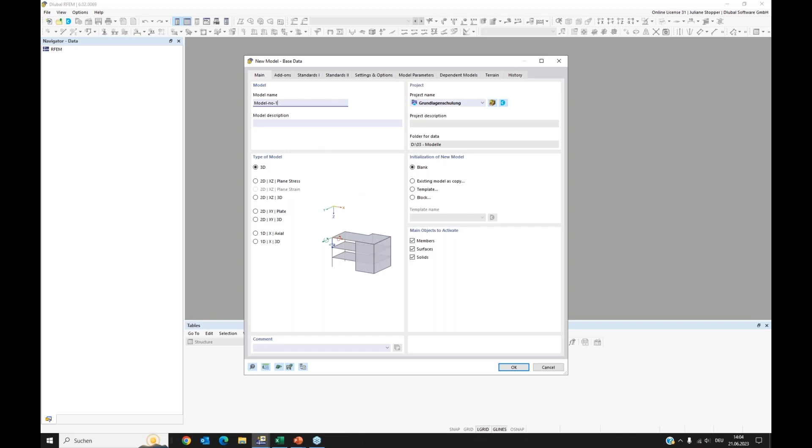In this register, I don't need to change anything. We can jump to the add-ons register and activate our geotechnical analysis add-on, found in the area where special solution add-ons are placed. I activate it and press OK. Then our model is prepared, and the add-on will be integrated into RFEM. So here we go - we have an empty model now, and we can start modeling.

First we go to materials, and I will create the materials we need in this first model. I will use materials from the library, which we can open via this button. I'll use gravel, a sandy gravel, as the first material.

I apply this, then add a next material - sand, maybe coarse sand - and a third material, medium plastic clay. This is just an example of materials, because we will focus on modeling today.

One more thing - when we have the geotechnical analysis add-on activated, we can select the material type soil. When we have a material of type soil, in the material model part we can find the special, valid soil material models. We currently have the Mohr-Coulomb model and a nonlinear elastic material model.

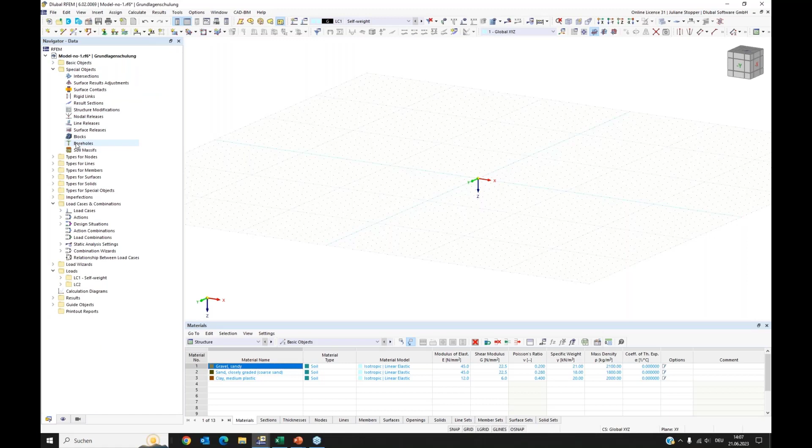We will go directly to the special objects, and here we can see 2 special objects that came with the add-on geotechnical analysis. We have here the boreholes, and we will now use them.

Here we see the dialog for entering boreholes. The boreholes provide you an option to directly enter the data you have from your geotechnical report. You have, for different locations at your field where you will construct your building, values along the depth that came from that report, from tests and so on.

And this you can enter here. You can enter the location of that borehole. You can enter a groundwater level. We will do this here, we give 4 meters. And here you have to, or you can, assign the soil layers.

We start from the top and go into the depth. In my example, we have sand at the top, and it's 2.5 meters deep maybe. As the second material, we discovered or found clay. It shall be 2 meters, and then we have the gravel, which is 15 meters in my example.

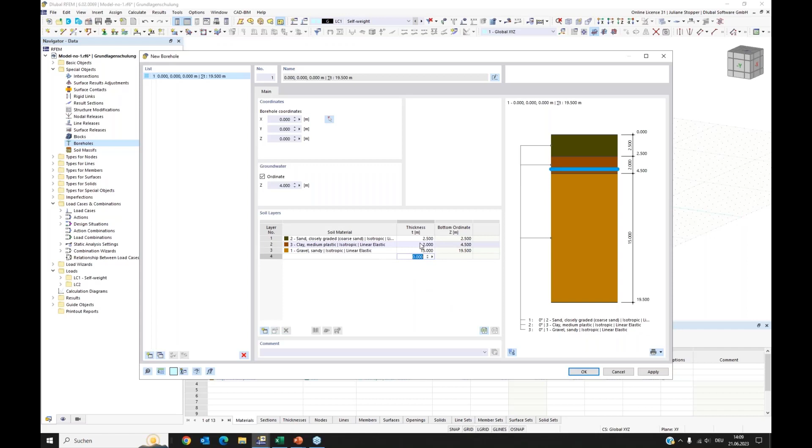Okay, now we have the borehole data given, and we can say okay. Then we see here our first borehole. I will remove this

work plane - I will deactivate it so I don't see it anymore. Here we have the first borehole, and we need some more. We have, of course, more in our field, and I therefore will now use the background layer. We can find it here in the navigator, in the guide objects. Here at the bottom you can find the background layers, and I will open the dialog.

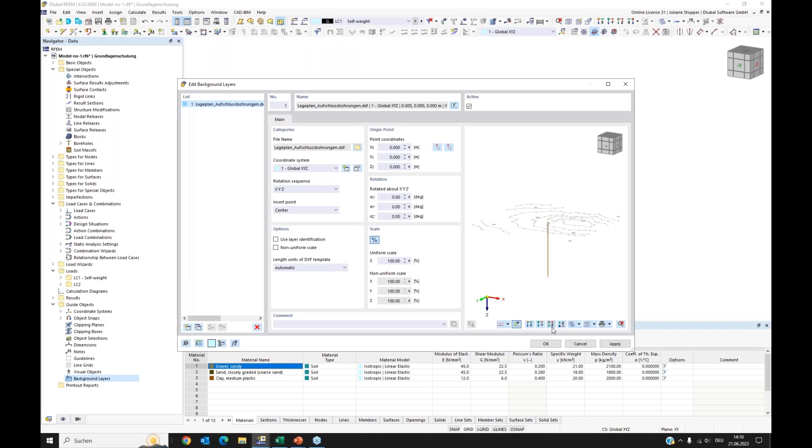As a background layer, we will import a DXF file, and I can do this here. I can directly go here, and here I have the plan of my area, and in that plan the locations of the boreholes are given. I see that I have to transform this. You can do this in this dialog, and this is the plan how it is correct.

And I want to use an option - I want to use the option Use Layer Identification. I activate it, and there you can select the layers of your DXF file that shall be used for the background layers. I deactivate the DL nodes. And this is a preview, and I accept this, and this is fine.

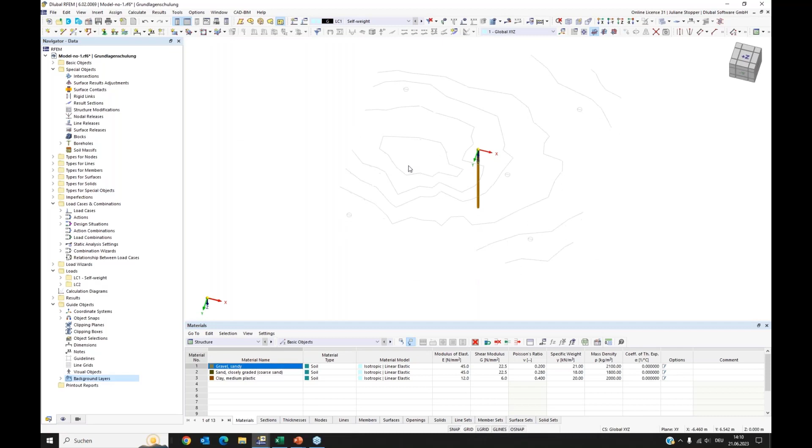Okay, now this is, let's say, my map with the positions for my boreholes. I will modify the object snaps - you can also find this in guide objects. I only now want centers to be picked, and I say OK and set to active.

So now I want to place more boreholes via drag and drop at all these locations. Therefore, I create a node at the top just to help me doing this. Okay, now I can select this. Now I select like this. I have my borehole and this helping node selected. I press Control and I can move it to the place in my background layer in the graphic. And as you see, the last copy is always selected, so you directly can go on with copying with drag and drop.

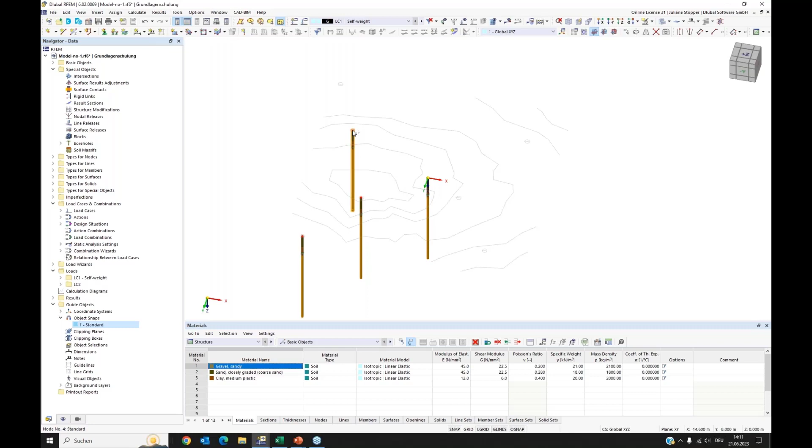Okay, that's it. Now I have my borehole in all the locations. I wanted to delete the initial one because there's none. Now I have, at all the locations that I got from my project partner with that plan, placed these boreholes. I will delete these nodes - I just needed them for the process.

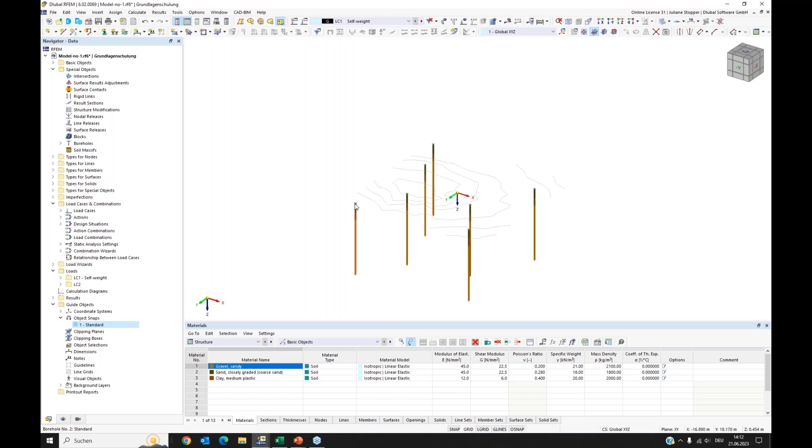And now I have my boreholes prepared. Yeah, and there was no need to measure these dimensions or to fill in data manually - you could just use the drawing.

Okay, then I want to use my boreholes. I can use them for creating the soil solid that shall be analyzed. And therefore we have our second special object - you can see here we have the soil massifs, and I open the dialog for this.

With the soil massif, you can generate from boreholes the soil solids that you need for the analysis. You can enter manually the numbers of the boreholes, or select them graphically. There I have them assigned.

Then you need to give geometrical information for the soil massif. You have to enter a center, I keep it with 0, and you have to give the dimensions. I will give it 40 meters along both sides. And we have the option to activate a groundwater level.

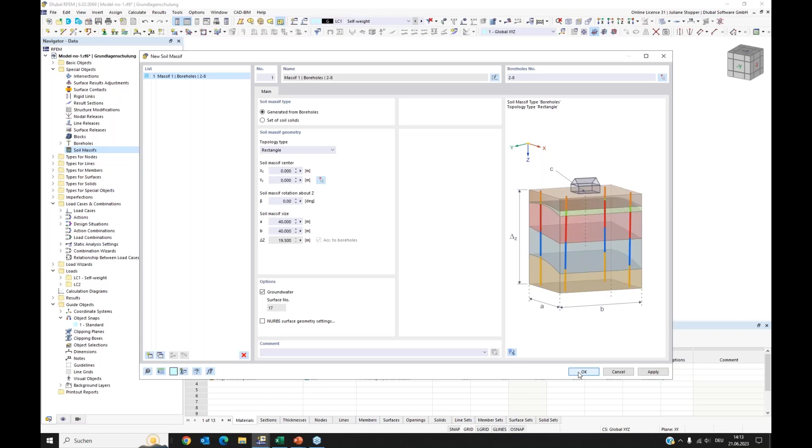Okay, we gave all the input that is needed. And now here we can see our soil massif, our soil solids were generated. I switch on the solid model, we can see it more easily.

We have here in the navigator for display the option to change the display so that the color is dependent on the object property. We can also see here the material and the color that belongs to each material.

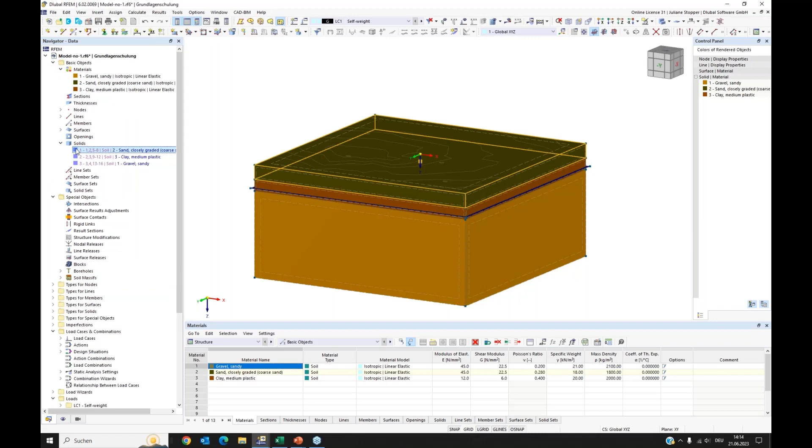So what came with our soil massif? Our soil massif generated 3 soil solids for us. We can find them here. For each soil layer, 1 solid was generated. And we also have a groundwater level surface generated.

And we have, we can find here, surface supports generated. This and this. We can see them also in this window when we go to wireframe model, for example. Here we can see it.

We have at the vertical boundary surfaces a sliding support, so only in the local Z direction these surfaces are supported, and we have fixed support at the bottom surface.

So with this generation, the solid is connected to these boreholes. So if you change data in the borehole, if you change a layer thickness or something, the massif will be automatically updated.

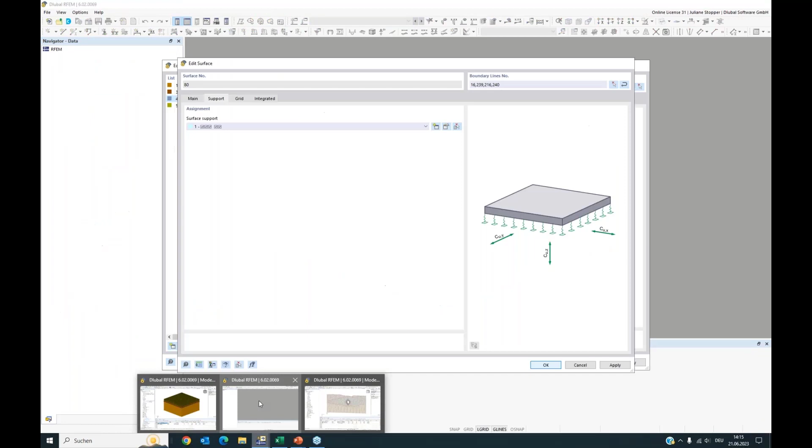Yeah, so that's it. This is what I wanted to show with the first model. We can go to the next example. This one is prepared. Okay, I will save it and we go to another RFEM for going on with the next topic.

In this next topic, we want to use a DXF file again, but we will not use it as background layer. We will directly import it, and this I can do here. I go on File and go to the Import button. And here I can import a DXF file.

I have to select the file. I have it here. This is a geological section of the ground, let's say, a drawing. And we will come to an import dialog where we can do last settings before the import.

Yeah, here it is. Here again, I can use this layer identification. And again, I don't need all these nodes. In this case, my model is prepared. I don't need coordinate transformation, so I can say, okay, it can be imported. So, and this is it.

I have here now the DXF file imported, and now we can see the difference regarding the background layer. Here we have real objects imported. We have lines and we have nodes, and we can work with them. We can edit them, modify them, use them.

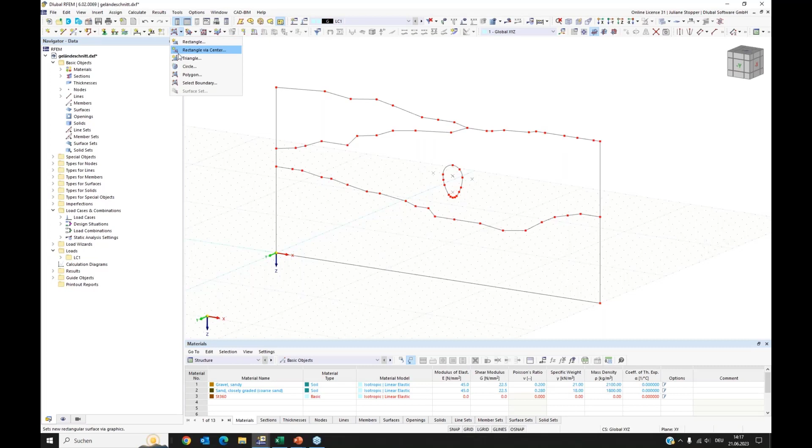Yeah, and this is what we will do. We will use them. My plan is, or what I want to do, is to extrude this model into the depth, and therefore I need a surface here. And this we are going to do. We have here this button. Here we can create surfaces, and I use the select boundary option.

I need a stiffness type without thickness. I don't need a thickness. It's just a surface for being the boundary surface of a solid. Okay, I have the first one. I select the next lines of the second surfaces, and the third surface is defined.

Okay, then I want an opening here. This is, let's say, the shape of a tunnel here, a small tunnel. And we have here the option to create openings. And again, I use this graphical option where I can select the boundary lines graphically, and my opening is being created.

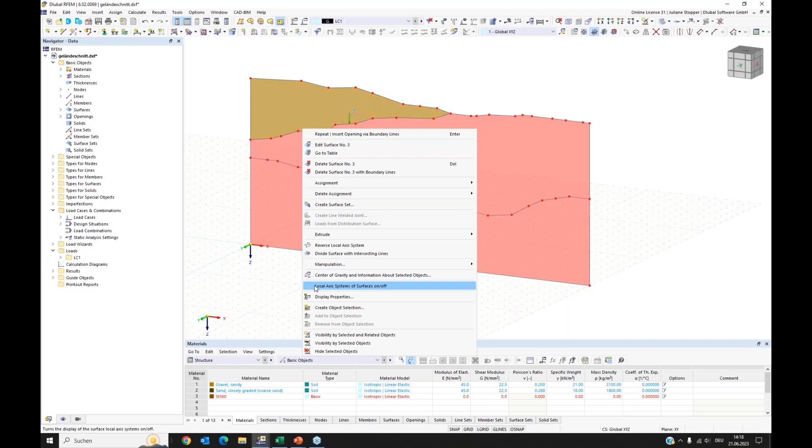Okay, with escape, I can leave this tool, and yeah, my surfaces are ready. Only I want to check the local axis. I can do a right click and switch local axis system on in the display. Now I see my surfaces' local axis, and I see this one is showing into the other direction.

I want to have them the same orientation. So for the surface, I reverse the local axis system. This helps me now for my extrusion. I now select all these surfaces, do right click on them and go on surfaces. And here I have the option to extrude, and I extrude surface into solid.

Okay, I have here this preview, but I can go here and enter the value I need. I want to have -1 meter for the extrusion.

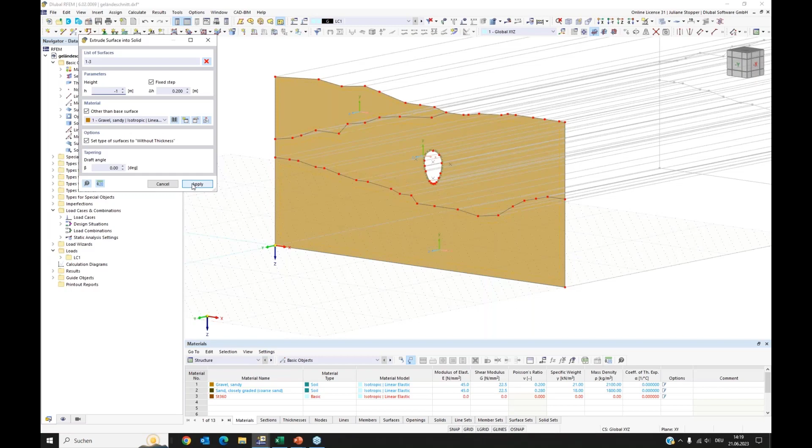I can apply this, and my model is created. I will switch off the local axis systems. This is a model that can be used if you have plane strain conditions. Then it's enough if you just cut such a thin layer of your model, and it is usable for plane strain conditions.

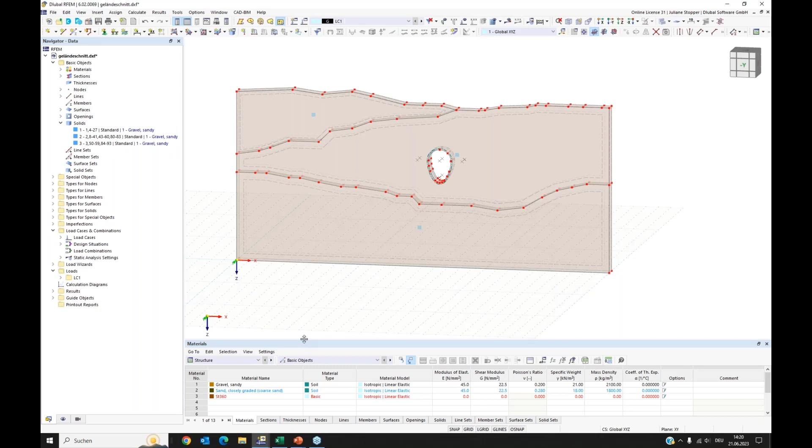Okay, so now here we have solids. What we need is the material. I have materials prepared for this model, so I want to use the Excel import. Let's say I will do it like this. I have here my material and I import it.

Okay, and now I have materials. I will also go to the base data. As we started with the import, we didn't activate our add-on yet. I will do this. We go to the add-ons register, and again here in special solutions add-ons, we have it now activated.

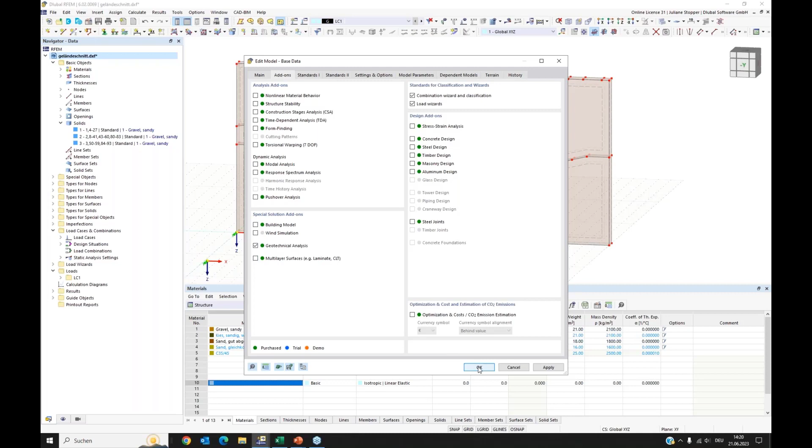Okay, now I modify my solids. They are all standard and they don't have the right material. So I double click on the center of gravity and I can change the solid type. I choose soil, and my first layer can have the gravel.

Okay, this one is ready. I go to the next one. Here I have sand. I will use this one, and of course it needs to be soil as well. This is needed for having the right material models, the option to use them.

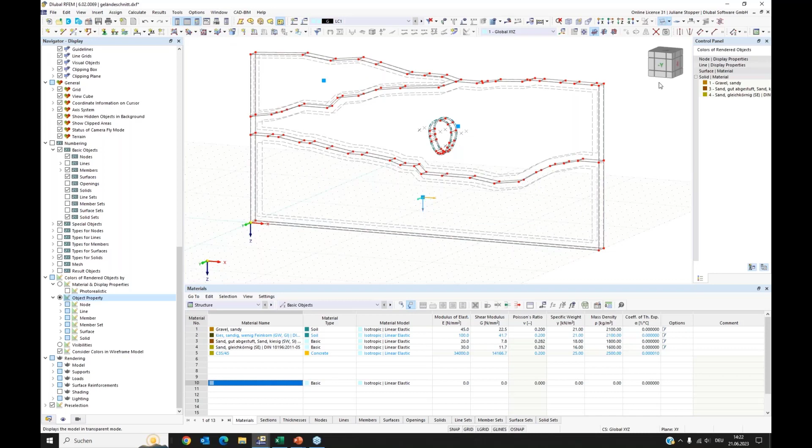Okay, I go to this one and I also set it on soil, and I will go to this material. Then I go here. I will change the display so that it is dependent on the object property. If we look here now, I can see that I have my 3 materials used.

Now the geometry is fine, it's finished. What I want to go on with is the boundary conditions. I go to the transparent view and I select my boundary surfaces.

With Control pressed on, I can select all of them. Okay, and now we can do a right click here and edit my surfaces, go to the options and activate the support for these surfaces. I have here some surface supports that I can use.

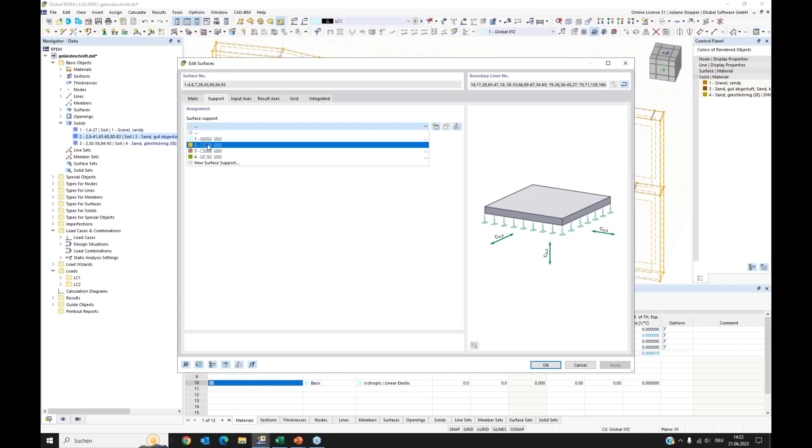I will use this one, but we can have a look inside also. Here we can see that the Z direction of the local axis is supported, and we can see it in the display now also. Okay, now with escape I leave these selected surfaces and I select this one, the bottom surface.

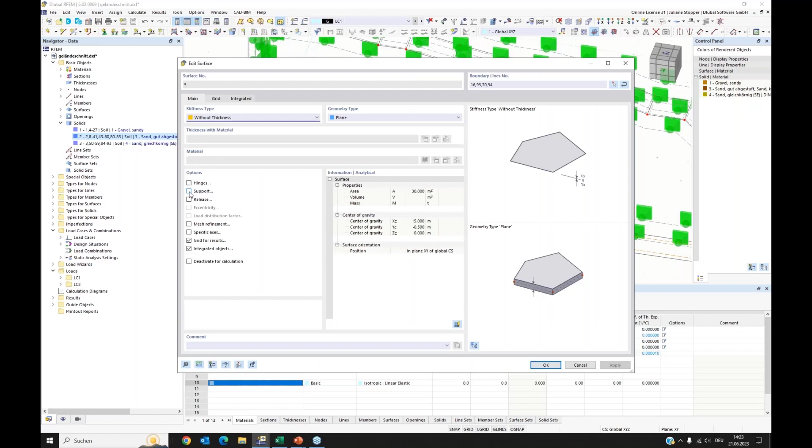This gets a support as well, but the fixed support. Okay, now my model is supported. I switch on and off the display of these supports in the display navigator. It's more easy to have the overview.

Okay, now I want to go to the next step. I want to create the mesh. I'm doing this here. Yeah, and I have a mesh which is relatively coarse for this example.

We can find the mesh settings here, in calculate and mesh settings. And we have here a general setting for the target length of the finite elements. This is valid for all structure parts. And we have an additional setting that you can find here in solids. This is valid only for solids of type soil, so we have an own setting for the target length.

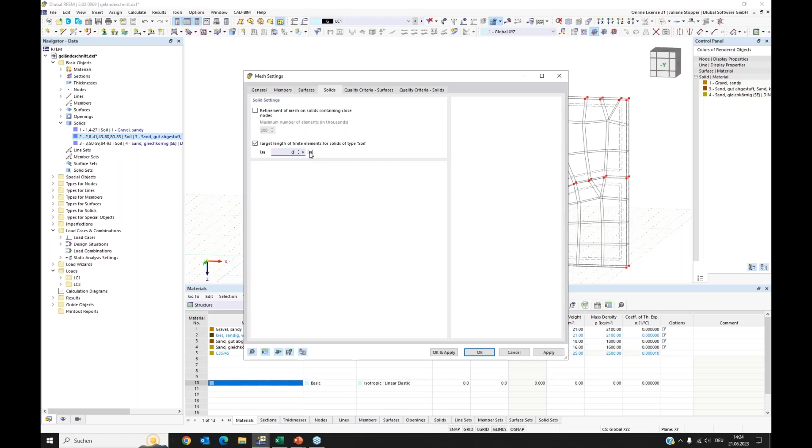Now here for this example, I want to have a finer mesh. I say okay, but I don't apply it yet because I want to use another feature for the mesh. I will show you now. I select the solids and go to the center and say solids, edit, because I go to the options.

I want to use a mesh setting, the layered mesh, and I activate it for all 3 solids. The layered mesh creates the mesh on the surface, and on the other side of the solid, the surface will get the same mesh, and in between there are layers created, and you can here define how many element layers shall be used.

For this model with plane strain conditions, one element layer is enough, so I set this on 1 and say OK. Currently, it is needed to go here to the layered mesh. This will be worked over, so you won't need to go there later. Okay, now we have the layered mesh activated, and I will create my mesh.

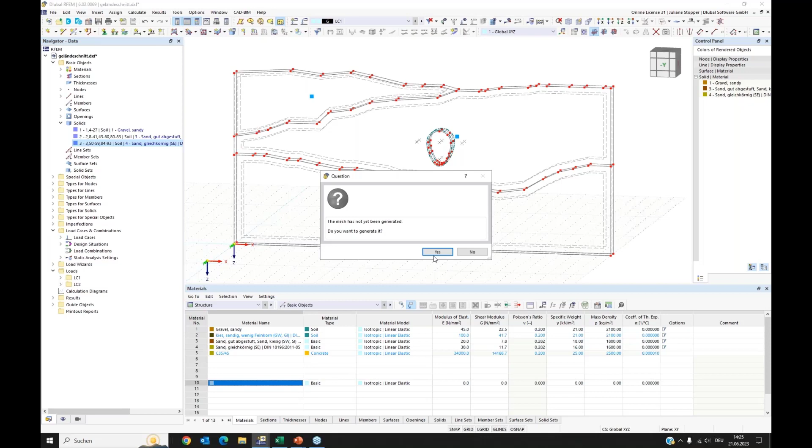Okay, and I can see a nice mesh. We will go to the navigator for display. Currently, we see the mesh of the surfaces, of the boundary surfaces. If we want to see the solid mesh, we have to check this button. And here we can see the mesh in the solid. It's quite regular, and we can see we have only one layer element.

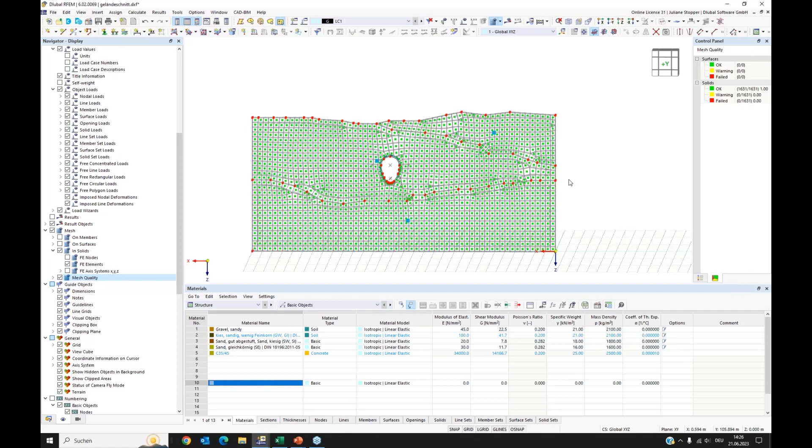One element along the depth. One last thing I want to show, you can also activate the mesh quality, and here you have an additional register where you can see the color, and you get information about the quality of your elements, and you can see if there's a warning or even a failed element. The criteria for these categories you can find in results, now in calculate and mesh settings, and here we have the register of the criteria.

Okay, that's what I wanted to show with the second model. This is finished. Now we can come to the third model and the last part of the modeling part of the webinar. For the third model, I want to go on with our first model.

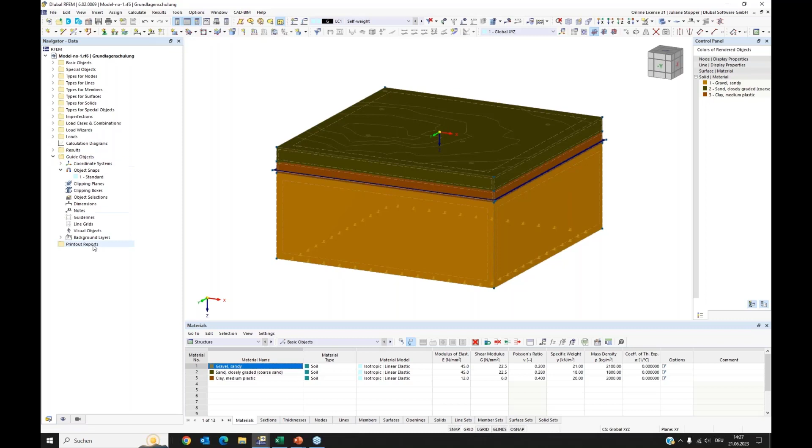For showing the IFC import, here we have our soil solid prepared. What I don't want to see now is this background layer, so I can go to guide objects. We have here the background layer, and I can deactivate it. So it's still there, if you need it for graphics you can switch it on again, but now it's not shown.

Here I want to import a small IFC file of a model. We go to import, we have IFC here, and I'm choosing this IFC file. It's a very small thing, but enough for explaining the procedure.

This model needs a coordinate system transformation. Therefore, I mirror Y and Z direction, and I say OK.

Here we have some information about the import. I can see which parts of the IFC model were imported, so you have an option to control whether this is what you expected.

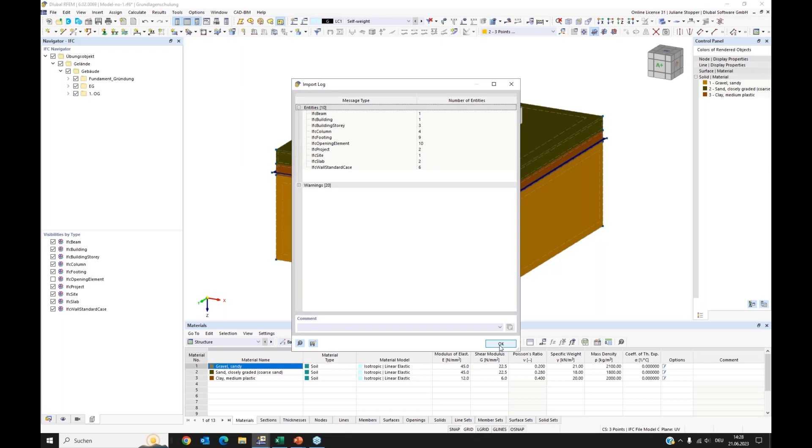Now here we have a kind of IFC viewer, our own IFC viewer. You have here in the navigator an overview about the parts of your IFC model. The IFC structure is a graphical object - it doesn't consist of objects that you can use for the analysis.

So you have to convert them. You have to, because we need a model for the analysis. We have to convert these graphical objects. We want to do this now.

One option you have is to use this graphical information with object snap, and model manually the parts of the structure you want to create. The second option is you can convert graphical objects you have here and use them.

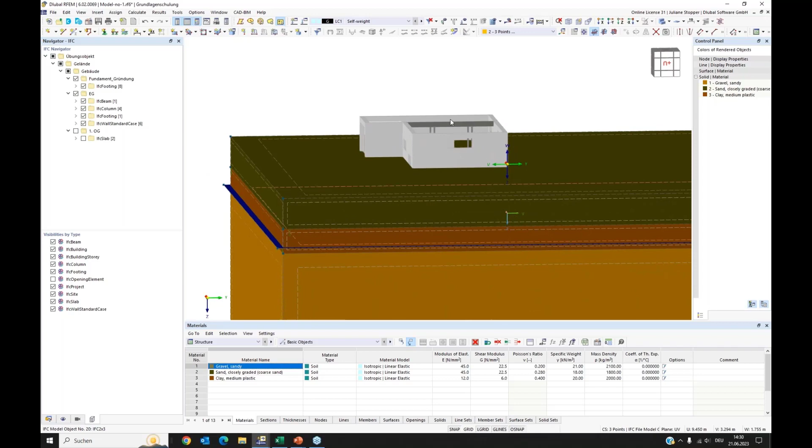I now want to, for example, switch off the slab. Now we can have a look inside of the model, and I want to convert this beam. So I can do a right click on this beam and say convert into straight member.

This beam hasn't got a material yet, that's why it's displayed in red, because we had only soil materials before in this model. So I can see in the Edit Member section dialog that there's no material. I can create a new one from here.

The dialog opens, that we also reach via the main navigator. Here I can add a concrete. I will use this one. Say OK - then our beam has a material as well.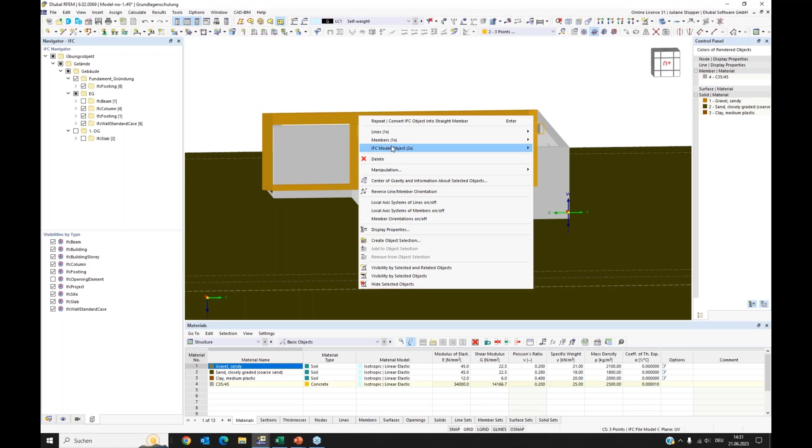OK, you can do it like I did - you can click here and say convert. But you also can do it from here, from the navigator. For example, you can also convert all walls at one time with one click.

But I don't want to go into it too deep, I just want to show this example. You have to do some kind of overwork - it's not enough to convert it. I will show.

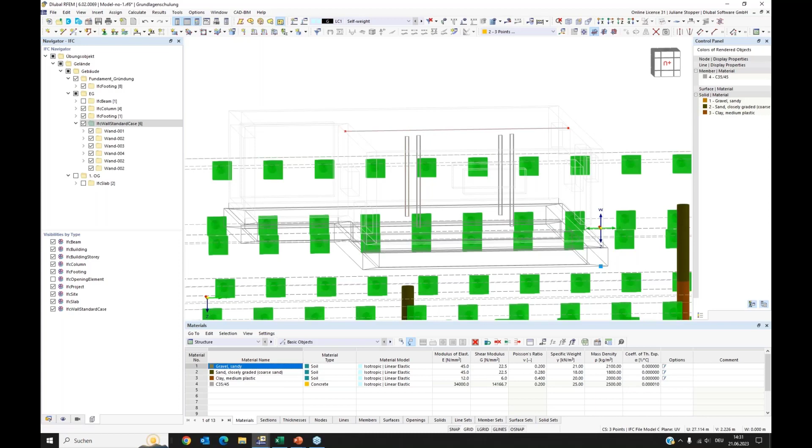I will now also convert these columns, convert into straight member. And it can only convert what exists from the drawing, and the drawing had these shapes.

And what we now can see, if we look at our RFEM structure, these were now converted. If I switch off the IFC model, I can see these are existent in my RFEM model because I converted them to analysis objects, but I can see that they are not connected.

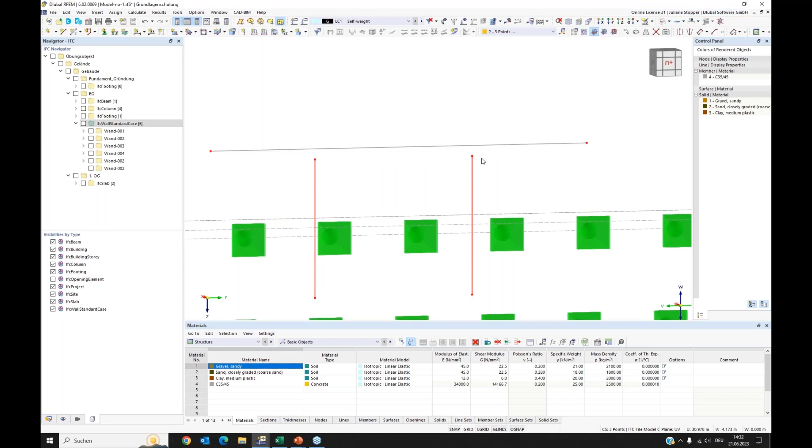So I have to do some overwork after converting all this. For example, in this case, we can extend them up to the next member, and then they are connected.

So some work needs to be done to have the full analysis model. We have our own webinars for this, for different interfaces for the import of IFC files or SAF files - you can find several webinars that go into deeper explanations for this.

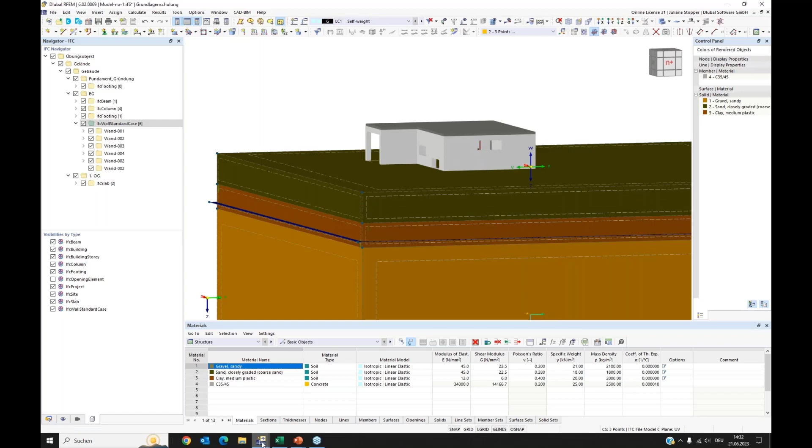I will stop this here, I just wanted to show this option. We will go to a next model where this conversion is done. I will go here - I have it prepared.

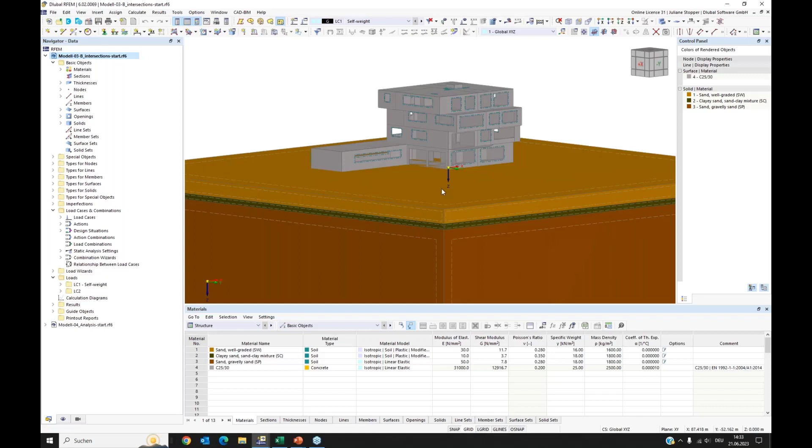In this model, I had a building that was imported via the SAF interface, and it is prepared now for the analysis in RFEM. However you reach this model, you can use IFC import, SAF import, or other ways, or directly model it. If you have finished your building, you can use it to modify the solid so that they are connected.

If you have a building with a foundation slab that ends on the top surface of the soil massif, it will be automatically integrated. But here in this case, we have a building with a basement floor that is in deeper zones of the soil massif, and it is not yet integrated. Up to now, the building and the massif don't know each other, they don't share nodes of the elements, and they wouldn't share stiffness, so the building is not supported yet.

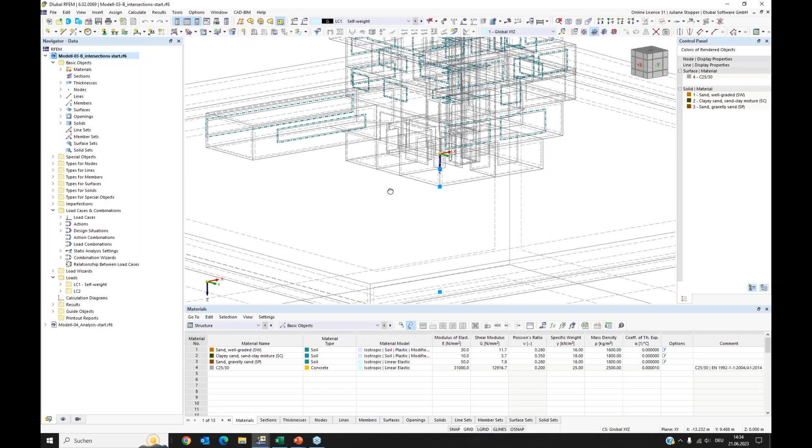That's what we have to do. We have to model it so that it is integrated, and I want to do it with the intersections. I want to use a solid intersection to cut my surrounding solid, my soil massif, and this is what we are going to do. I will here in the basement floor create a solid kind of help object. Later I won't need it, but I will now use it for modeling the hole.

Here we have extrude, and I say surface into solid again, and we need it to be minus 2.98 meters. I can say apply, and now I have my solid here. I can also see this. I have soil solids, and here's a fourth solid created.

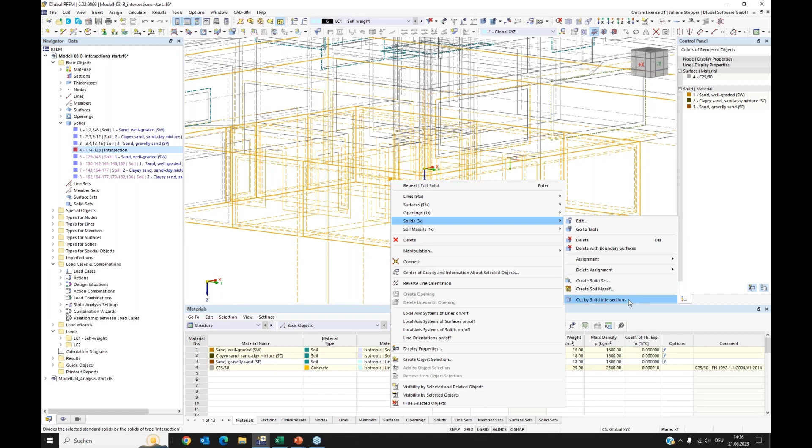And this solid I will now edit and change the type of solid to intersection. With this solid type, I have the option to use Boolean operations, and I say yes. Then I can select them, go on the model and say solids, and here we have the option to cut by solid intersection. And this is what we do.

Then you can see that we have here now one solid at the bottom, and we have the upper layers, and they have now here the opening. We also have in the building now the parts that were cut from the previous soil structure. We can also have a look at this. Here we can see that an opening is created.

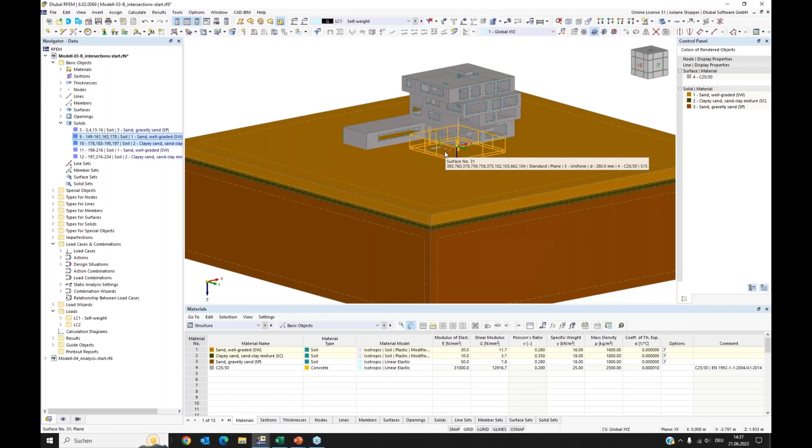We now will delete these soil solids that are placed in the basement floor. In further analysis, when you use construction stages, you can keep them and use them. You can calculate your initial state with all the soil solids, and in the next stage you can remove these solids, modeling the excavation by deactivating them. Here now, for just showing it, I remove them.

Okay, so now I have only surrounding soil and I have my building inside. We can again have a look at this. And now they are connected. They share these boundary surfaces, and the mesh should be good.

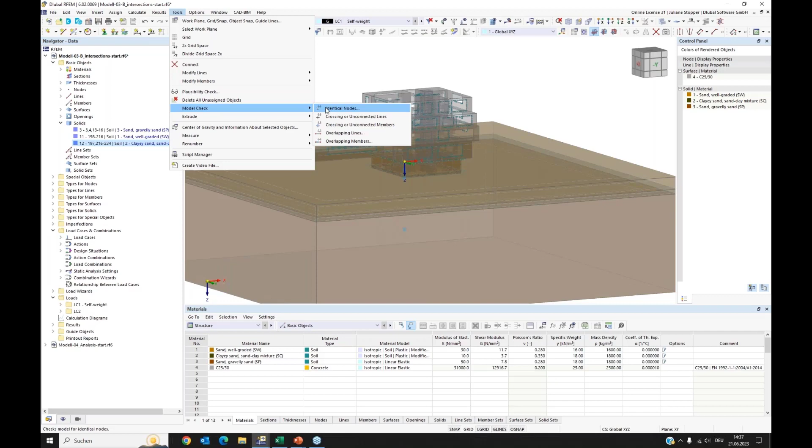I want to show you also the tools we have. We have model check tools. I want to use it because this model was imported, it was overworked, and now we used the Boolean operation. So here some identical nodes were detected in my model, and I can use this selection to repair it, to unite nodes or delete unused nodes. I agree, and now these nodes are gone.

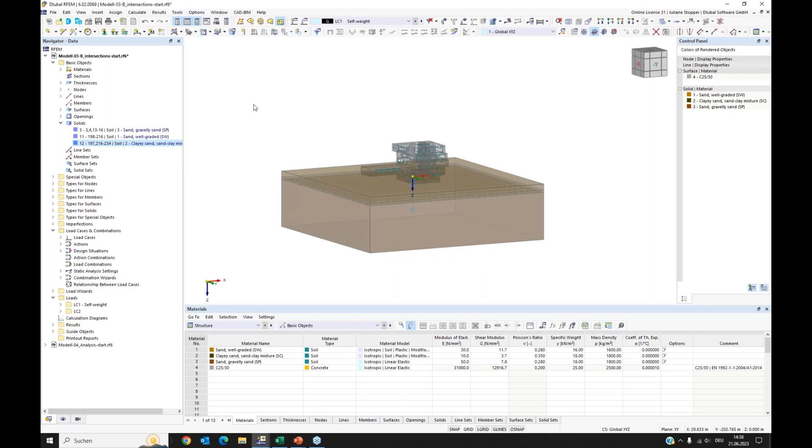Then I want to use the overlapping lines check, and I see I have some overlapping lines. For those, I will use this button. Okay, so if we look now, it is fine. Okay, then I want to do a last thing with this model.

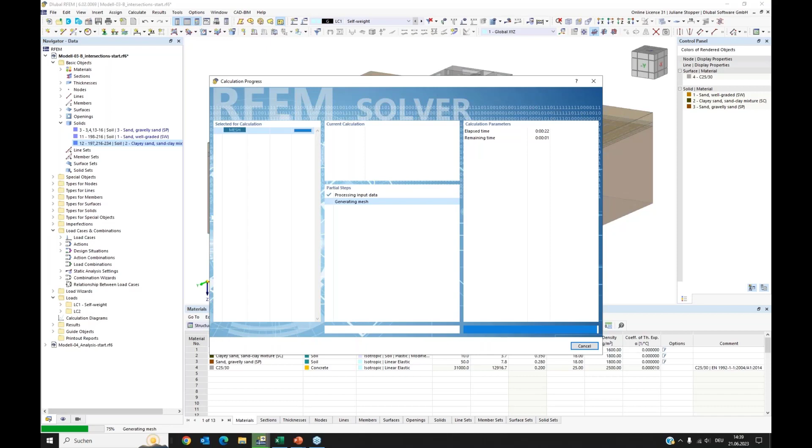I want to create the mesh. It's a bit more slow because of the presentation. With GoToWebinar, generally it wouldn't be that slow.

Yeah, and here we can see our mesh, and we can also now see that it makes sense that we have different mesh settings for the soil solid and the superstructure. That's it. Okay, I came to the end with the modeling part of this presentation. I will go back to the slides.

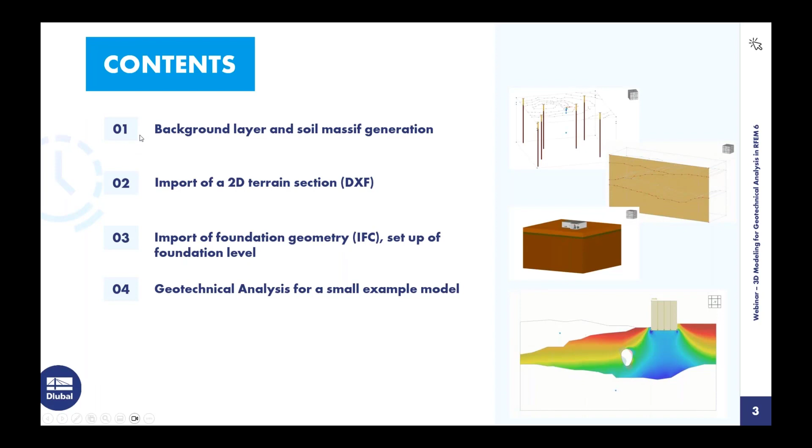We finished the first three steps, and I will show a summary slide. Here we have the modeling procedures that we went through listed, and some additional. We have several interfaces in RFEM 6, and you can find further information about it on our website.

We have web service and API where you can create applications for procedures you have to do again and again. We have integration with Autodesk Revit. We have interfaces to Rhino Grasshopper. We have an SAF interface. We have an Autodesk interface. The DXF file that I imported, I could have also directly imported from AutoCAD - this is another option. We have Microsoft Excel export and import. We have DXF import-export interface for IFC, and we have the background layers we saw.

Then, of course, you can directly create the geometry and use all the tools we have in RFEM 6 for model creation. And then we have in our add-on geotechnical analysis special objects like the boreholes and soil massifs that support you with creating the model. Okay, that's it regarding the model part.

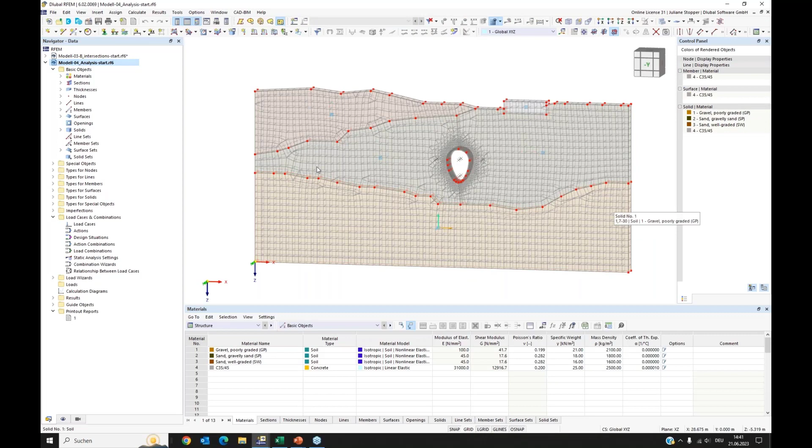Now we come to our fourth example. Now we will analyze a model. So I open model 4, and we will have the model in plane strain condition. So I have taken this geometry again.

I prepared it a bit. We have here this existing structure, this small tunnel, and I assigned concrete as material to it. And we have here, let's say, a kind of new structure that shall be erected. What we want to analyze is which stresses and strains happen in the soil, and which load, which inner forces will arrive here at the surface of the small tunnel. For this, I prepared the geometry.

Let's go to the materials. One time, I have now the nonlinear elastic soil material used. You can find more information in the online manual regarding the soil materials, and in the last webinar I spoke about this material model.

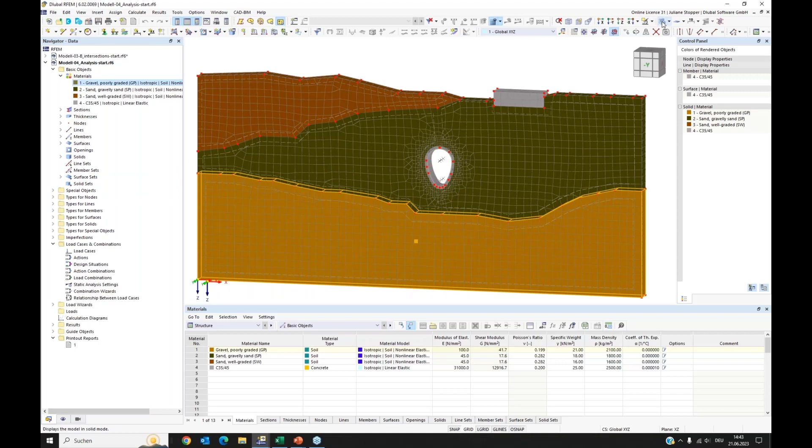Then I have mesh refinement used, we can see here. You can find the refinements in the types. I used a line mesh refinement, and when we have a look inside, here's the assigned lines. We can remove it - I only wanted to assign these lines because it's something nice.

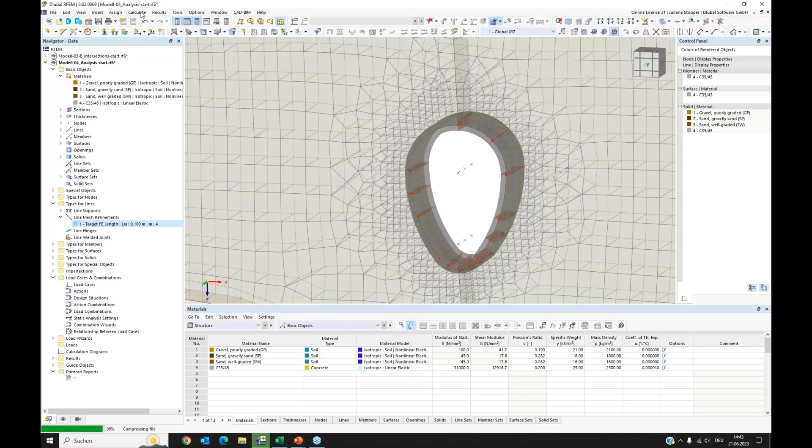The layered mesh automatically extrudes it into the depth, so it's not needed in the next step to again assign the lines. With this one line it's done. So we have this. Then all of the topology is prepared.

We can go to the loads and open the load cases and combinations. I click here on new load case. I deleted here all previous settings, so we start from scratch. We will define a first load case. We will have the self weight of soil.

Therefore, we have an own action category that comes with the add-on geotechnical analysis. It's the permanent soil action category. With this action category, it's possible to activate self-weight only for soil solids. We need this because in the geotechnical analysis, you need this self-weight of soil load case always as initial state, at least.

Okay, then we create a next load case. I have no static analysis settings given yet, I have to do this. So I create a new setting, I will take the default option. Only I will here use 4 load increments because we have the nonlinear material model used. I apply this and create a new load case.

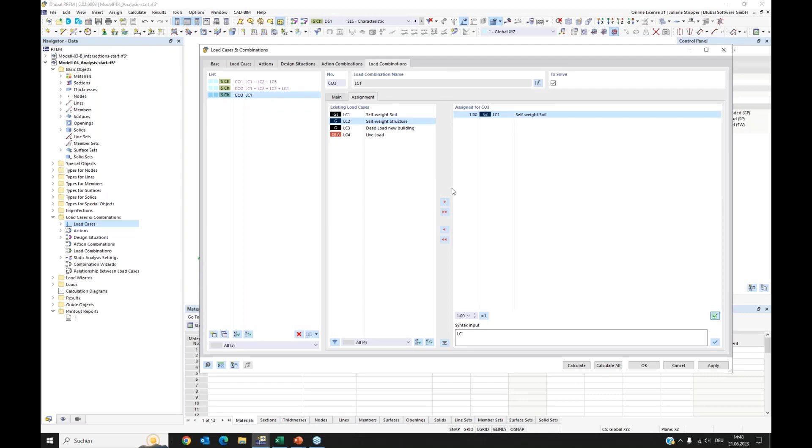I need another combination. I use the generator, but I can add also manually defined combinations. I want to create my initial state. In my initial state, the self-weight of soil shall be active, and I also want to have the self-weight of my existing building to be active. So I want to calculate the state of my environment or my soil and this structure before this building is erected. So I have self-weight of soil and self-weight of this structure.

I need to do something so that this structure is not considered in the self-weight, because this load case would consider all structure self-weight. Therefore, I have here in the options the structure modification that I can use. I activated it, and we can go into this. We have here the structure modification. I will give it another name.

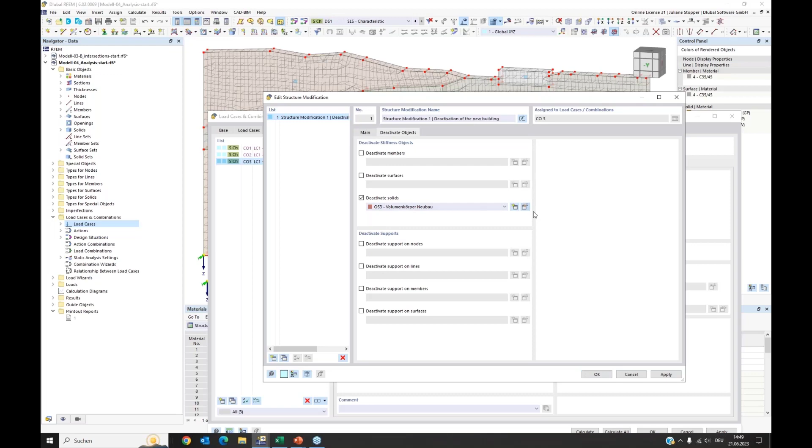It's deactivation of the new building. You have here the option that I used: deactivate objects. In this window you can select the objects that shall be deactivated. We have solids that shall be deactivated, and only one solid is selected. We can control this: if I look here, yes, my new building is selected.

This is fine, I can agree all this, and I have my structure modification active. So in this load case and in this load combination 3, my new building will not yet be considered, which is fine, because I want to have the initial state calculated. I also create a copy of this load case. I now want to have the following situation for my initial state. In my initial state, I need to know the stresses of this soil, because the soil material reacts stress dependent. So I need to know which stresses are there for using the right stiffness for further loading. What I don't want to know is the displacement.

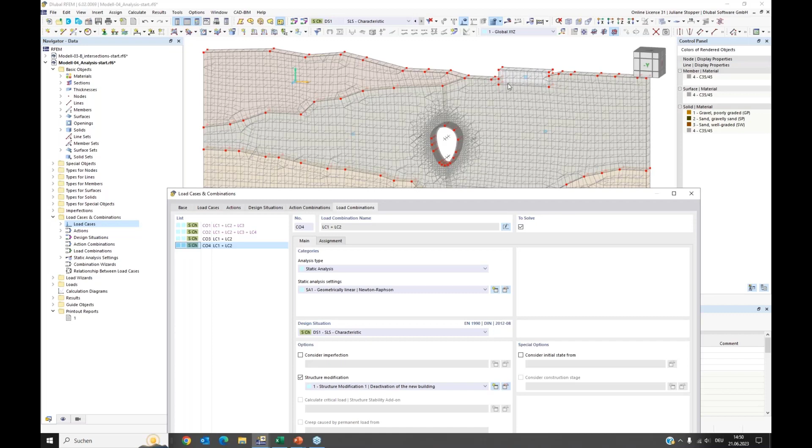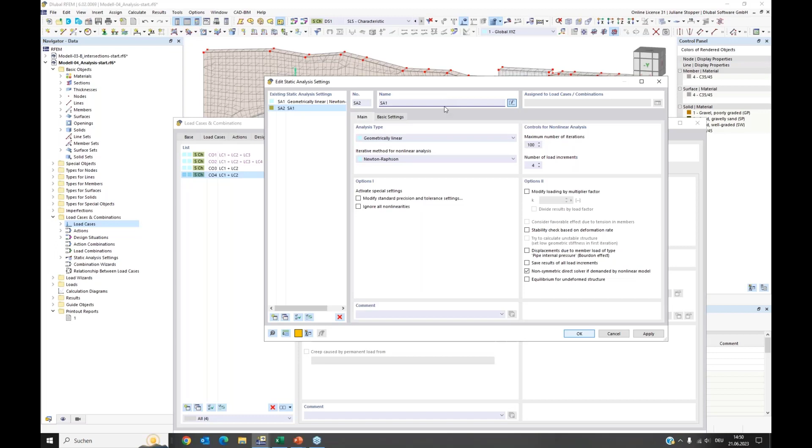I want it to be reset to 0. When my building is started, I want the displacements to start to be considered. Therefore, we have a special static analysis setting. We can again go here, and I will create a copy of this and rename it. It's actually the same as SA1, only it is for undeformed structure.

The setting you can find here in options 2. We have here the option equilibrium for undeformed structure. So when you use this setting, the equations will be solved, the model will be solved, the stresses will be calculated, but the deformation will be reset to 0. This is what we want, and for this combination 4, I will use it.

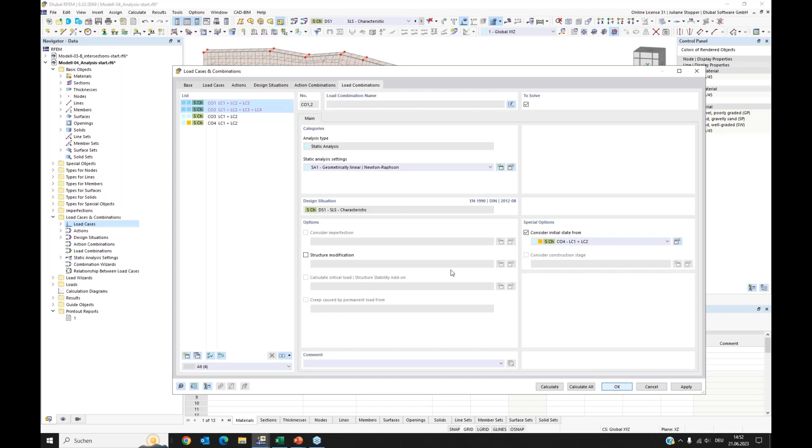I want this initial state with 0 deformations, but with the stress state, to be considered in my combinations 1 and 2. So I select these two combinations, and here in special options you can consider the initial state, and I select this one. So my loading in these combinations starts with the stresses and strains, and the deformations are set to 0. So with the stresses of this model, the deformations are kept as 0. So now we have this prepared.

What we need now is loads. We created load cases, but we have to give also loads. I will use this button here and define a dead load for the new building, and I'll say OK. The dialog opens, I can select the surface. This surface will be used, and I will assign 100 kilonewton per meter square. Now what I wanted to show is that you actually can stay in this dialog and press apply and next, then it would open, but okay, I closed it.

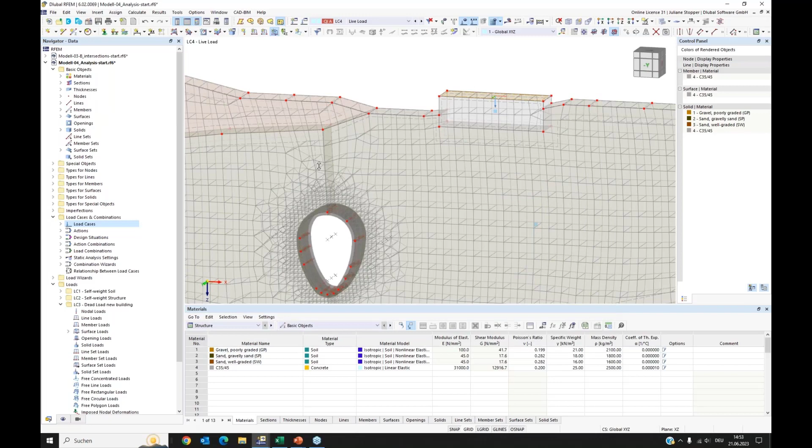So we now can use live load. I will again assign the surface, and you can use 125 kilonewton per meter square. We can control this graphically. We have the live load and the dead load, and if we look in the combination, we have both of them.

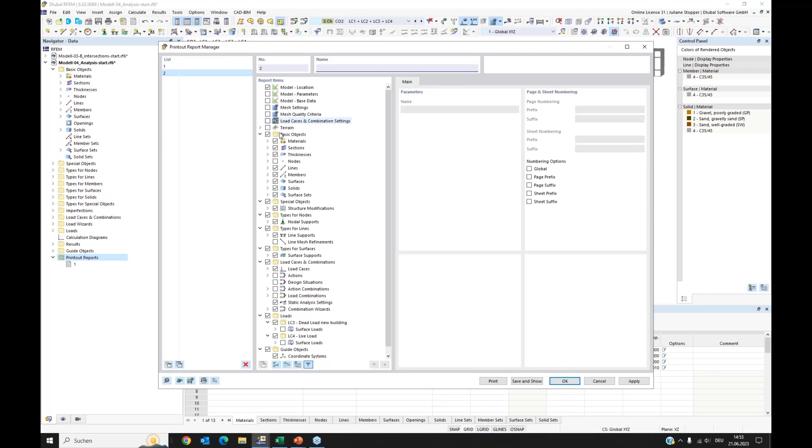That's it, I can also give some more color. I have something prepared for this model: a printout report for us. This can be found in the navigator at the bottom. Here you can do a right click and create a new printout report. You come to the printout report manager, where you can select the topics you want to have in your report. I cancel this as I have already prepared it.

I would like to shortly show... I prepared it so that I can print graphics now during the analysis process. Yeah, we will do this. Where is it? Okay, this is the first version of my report, and we have something good.

You can change the language. We can set the language here in edit. We want English language, so this is a nice feature. You can work in your mother language, and when you work for other countries and have to give another language, you can change this.

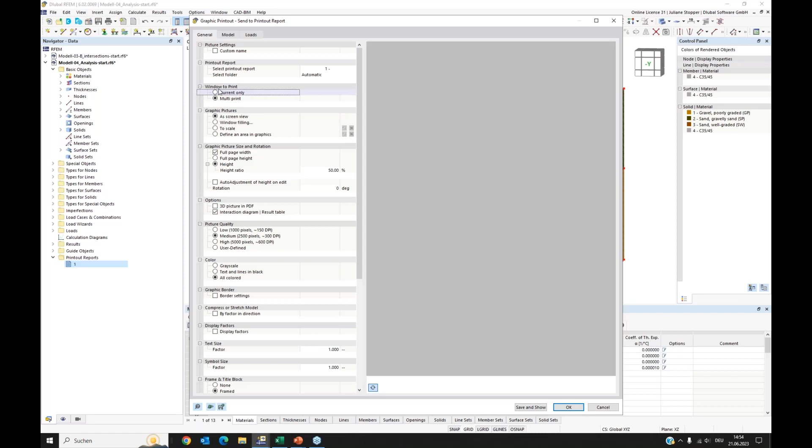Okay, I will close it, and we will now from time to time print into it. So I want to also print this loading situation. We can go here on File, Print Graphics to Printout Report, and you get a preview. I want to only print the current window. Here we see a preview, and it looks fine to me. I say OK, then it is saved in the report, but it will not be shown, and I can go on working. I can have a look later.

Okay, now everything is prepared and we can start the analysis. We can go here to calculate and say calculate. And now I would like to at first show this one.

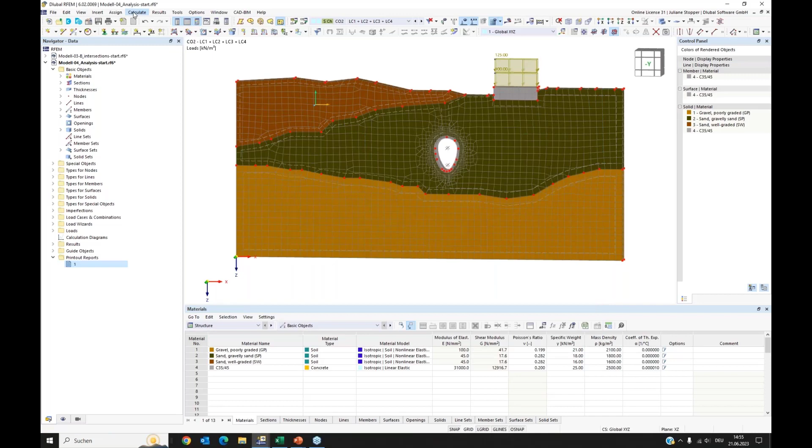Now this initial state is calculated. I want to also calculate the rest. We could also have selected this before. I will select the design situation, characteristic, and then all the contained combinations will be solved. So I select this and say OK.

Yeah, here we also can see the load increments. Okay, now it is done and we can have a look at the results.

First of all, I want to remove the results of this helping structure. Let's say we don't need to see this. I can here in the control panel select what shall be displayed, and I want to have the object selection. I prepared an object selection that only contains soil solids.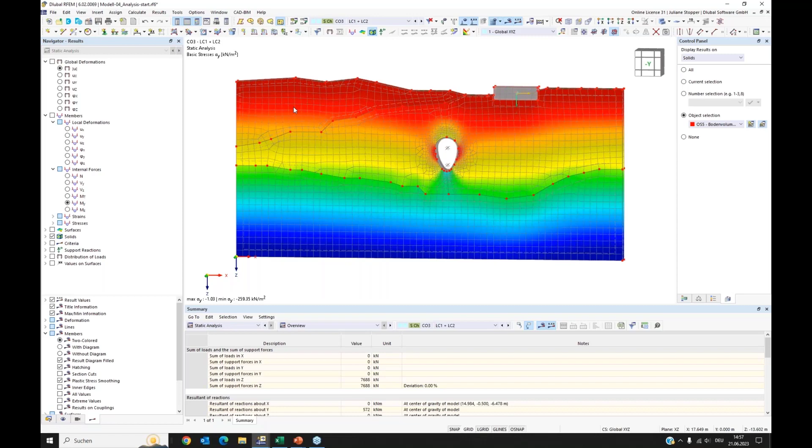But first of all, I want to go to the initial state. So what we have here is the initial state. It's the self-weight of soil and self-weight of this structure. This we deactivated. We have a deformation here. And we have, of course, stresses.

And this is what I said, I also deactivate the mesh. This deformation we don't want to see in our results. That's why we reset it to 0, because when I go and start my construction of this building, for me there's 0 displacement at the beginning of this load case, or load combination. So that's why we have this copy where we said reset displacement shall be used, and we can see it worked well. The displacements are 0.

But if we have a look at the stresses, we will see that we have stresses. And we can also compare it with the previous combination, and we see it's the same. So this is the initial state stress, the geostatical stress, and you can also control it. You can check it with hand calculation. You can calculate with the specific weight and the heights of these layers. You can compare it, and you will see it's plausible. I did it, and it's good.

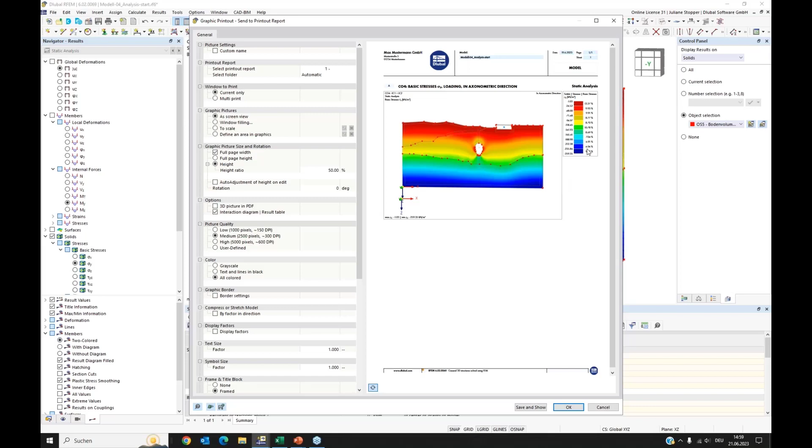Okay, then we can print the graphic. So we have a graphic of the initial state in the report, and I like it, so I say okay. And then we can go to the next load combination, and I will go to the leading one with the highest loads.

This is this one. So at first we can look at the deformations, and here we can see how, with this helping structure, it deforms, and how the deformations go to the deeper soil layers, and we have here the deformations.

Okay, but now we want to have a look at the stresses. We can here select solid stresses, and what we have here is the final state of this combination. So we have stresses of the self-weight of the soil, of this structure, and also of the new building.

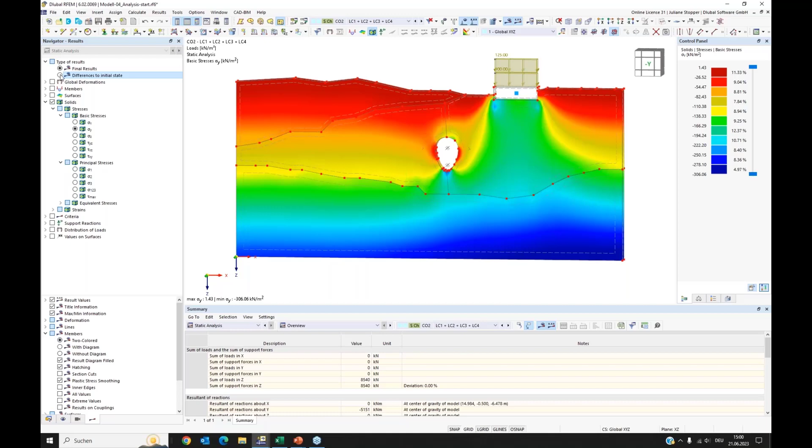We have the option to select another type of result. You have the option to just see the stress that came through the delta load between the initial state and this combination. So what came after the initial state is only this load, and if you activate this button here, you will see the load that came without the initial state. And we can see now the stresses that are caused only by the new building. And here we can see very well how it goes into the soil, into the deeper zones, and that here some stresses reach our shell of the tunnel.

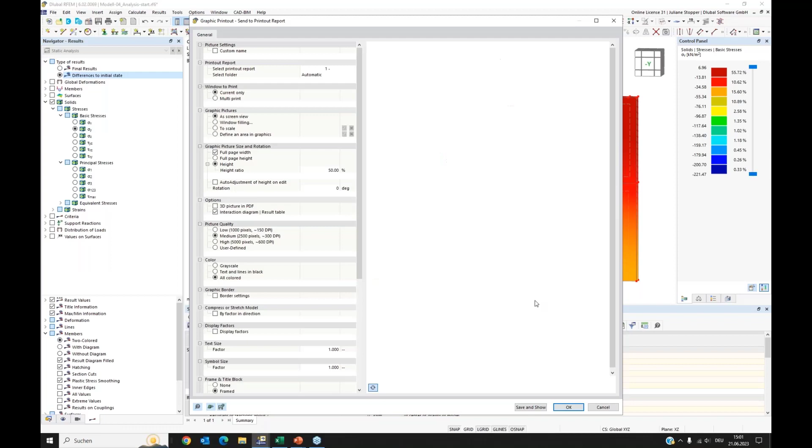I want to also print this one to the report. And we have again our preview, and it's fine. So we again can say OK. And I want to also see the final results and print it to the report.

A last step, I want to show that we can also have a look now at our tunnel, at our construction. We want to know what comes there. And I have created a result beam. I put a line in the center of these surfaces of the tunnel shell, and there in the middle I placed a result beam that integrates stresses and forces of these surfaces that I assigned, the surface of the tunnel.

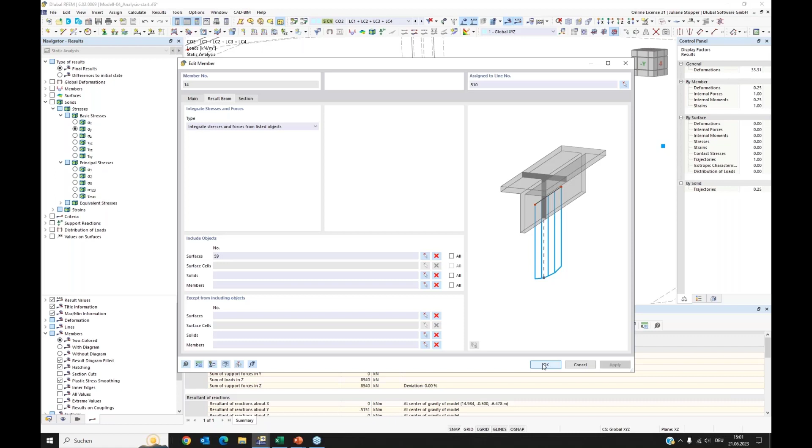That's why I can use now member results, and I can see what reaches, due to this load combination, in my tunnel. Again, I could also select the differences to initial state. So this is, for example, the moment that came only from the construction of this new building, and I also can look at the final results. So in total, I have this moment. Now I can also check other internal forces. I can check displacements and so on.

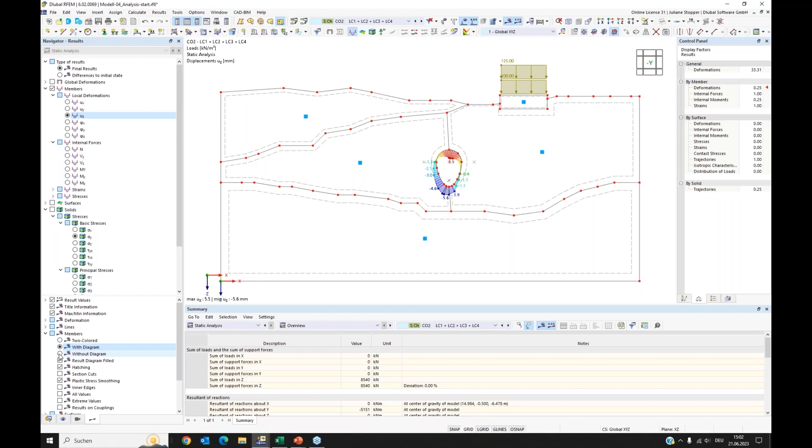What we can do also is select for members, as we have the result beam. We can also select a colored shape, and then print this as well to the printout report. And I want to use the multi-print because I want to have the same view, the same perspective.

I will use this load case, this load combination, and here you can select what kind of forces you want to print. I want to print the normal force, the My, and the displacements. Okay, I say okay. Yeah, this is it.

I came to the end with that model. This is what I wanted to show you in this first, short analysis. This is the first step of the analysis of this situation, for first information about the stresses, strains, and displacements that are to be expected.

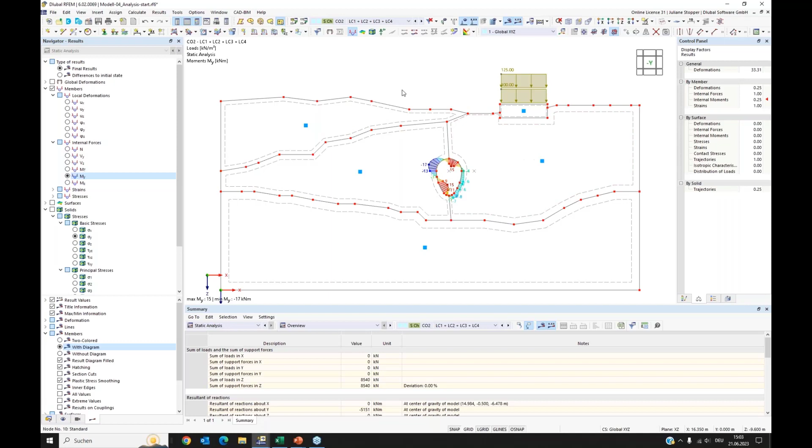In a further deeper analysis, the construction stages could be used, and the phases of the situation could be modeled more in detail. Then you would model only the soil, then remove the soil in the next phase, construct the tunnel shell in the next phase, do the excavation here, and so on. This you could model with construction stages. But for today's webinar, this is what I wanted to show you.

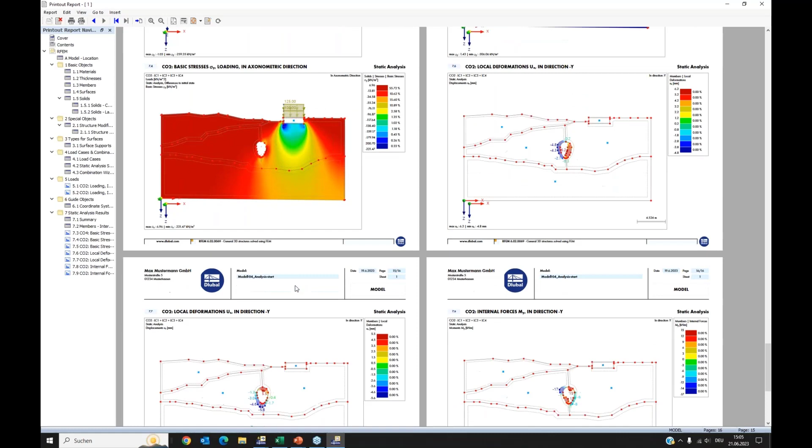As a final step, I would like to have a look into our printout report. Here we now have our report, and we have all the graphics that we printed besides. We have an overview about the situation, and we have our multi-print here.

You can easily modify your report. You can, for example, click here and say start with a new page. Then we have our tunnel information here.

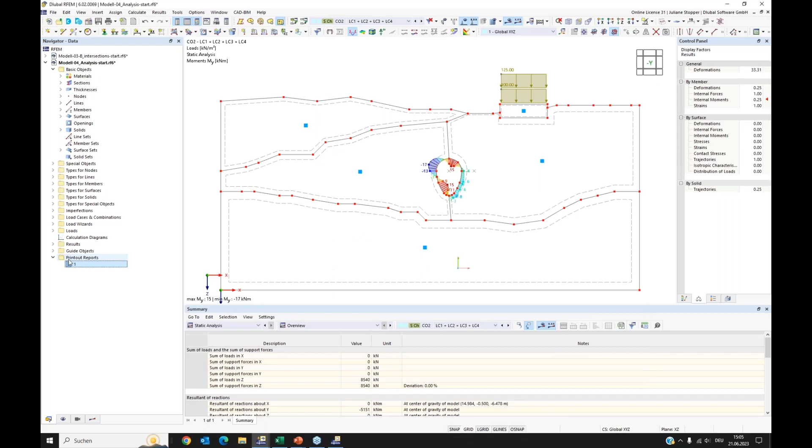One last hint: in the material, you can do a right click and say edit. And we have the option to activate our soil material, so that we get information about it. It will be shown here, also the values you gave for cohesion, for E modulus, and so on.

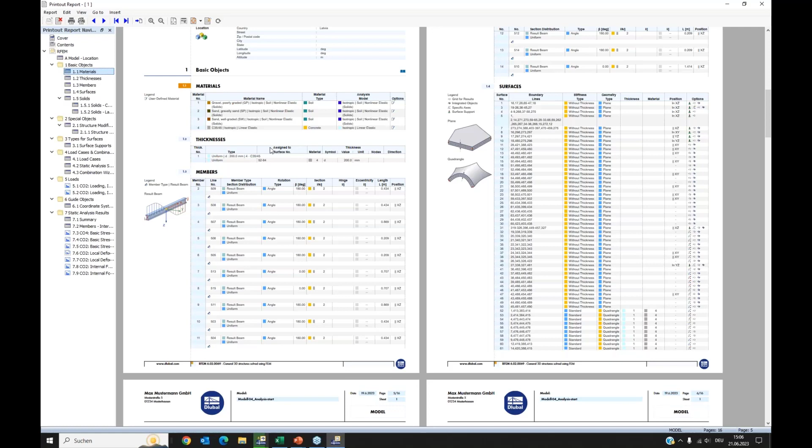Maybe I should have pressed this button. Save and show. Then it should come. This also is maybe a bit more slow because of the presentation with GoToWebinar. It's generally not that slow.

Here, this is what I wanted to show. You have the option to activate this detailed information about the nonlinear elastic or the soil materials information. Okay, that's it from my side. This is what I wanted to show with this webinar.

I hope it gave a good introduction of modeling techniques, of import options, that you can use if you have some files or data from project partners, to make your modeling procedure more easy. I thank you very much for your participation, and I wish you a nice evening and much joy with our software. That's it from my side.